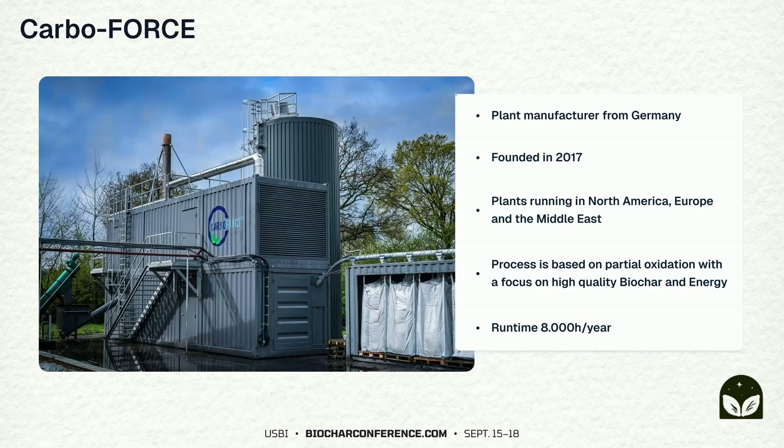Where we are in our stage of growth, we say 3 phases here. We actually have multiple phases, but we'll go through 2026. We've launched our first plant. We have a second one that's in development right now. Our first plant will deliver just over 400 or 500 tons of biochar per year. The second gets up to 4,000, and then phase 3 in 2026, with our expansion, we'll have over 17,000 tons of biochar per year. So that gives you a sense of that.

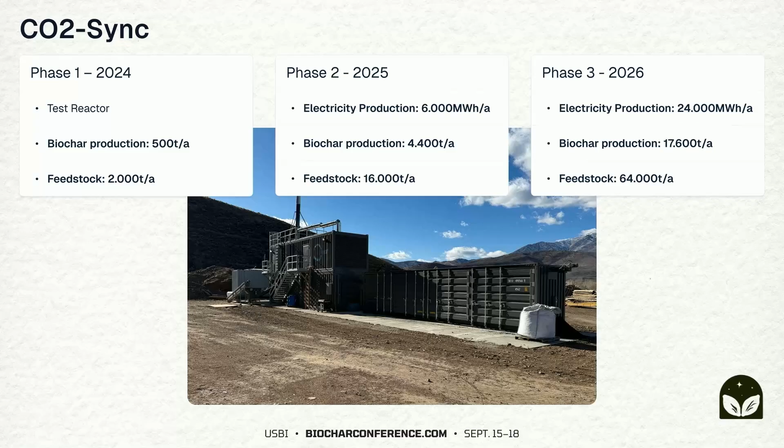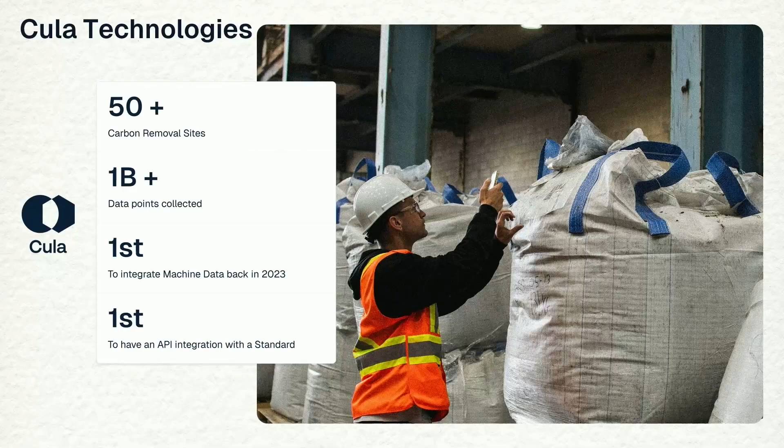For tracking and automating this whole entire process, we use Cula. From pulling it out of the earth to putting it back in the earth, we're tracking that whole process. When we looked at what we wanted from a system like this, one is the interface, because multiple people will be touching it—does it look good, can we actually interface with it? And then the second is automating as much as possible that entire data collection process. Part of that automation is the integration into the solutions itself, so we have API connections into the technology so we can track it throughout the entire process.

Our process, what is unique about us from a producer—there are a few things. First is our feedstock. We're mostly focused in the Mountain West. We use infested beetle kill forest as our feedstock. There is a significant amount of this forest available to us, and we set up locations that are strategically placed as close to that as possible. So we use that beetle kill forest, we chip it up in the forest, and then we bring it into the plant itself.

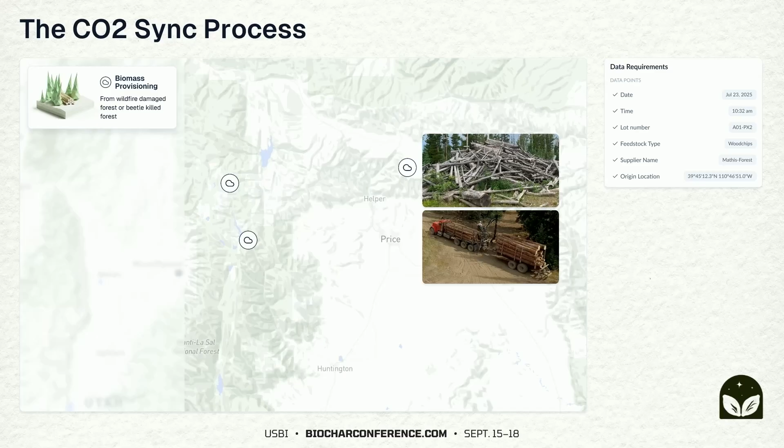Now, once we've done that, that's almost the end of our human intervention. We bring it in, we weigh the trucks, we then collect that data automatically, and it's integrated into the Cula system. Then we dump the chips into 3 separate cement bunkers. And then we have a system, a top load system from AA Biomass, and that's automated. We're not moving chips from one place to another and then staging it for drying and all of that. We just move it to one place, we put it in there, and then the pyrolysis system calls for it at a certain rate, and we're pulling that in.

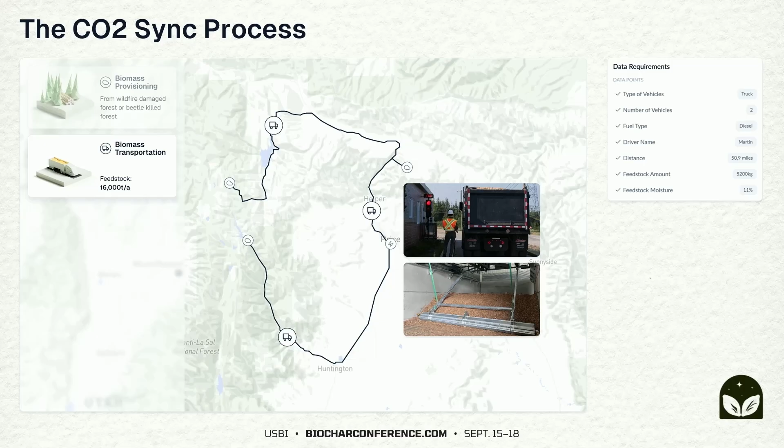That gets to the second part of this, which is the pyrolysis itself. The other thing that we've done to eliminate the labor and the input is we have integrated dryers into that, so we're not second staging it. CarboForce has an integrated dryer, and that way we can just move it straight in there. It's drying, it dries it out to the right moisture, and then we're pyrolyzing it.

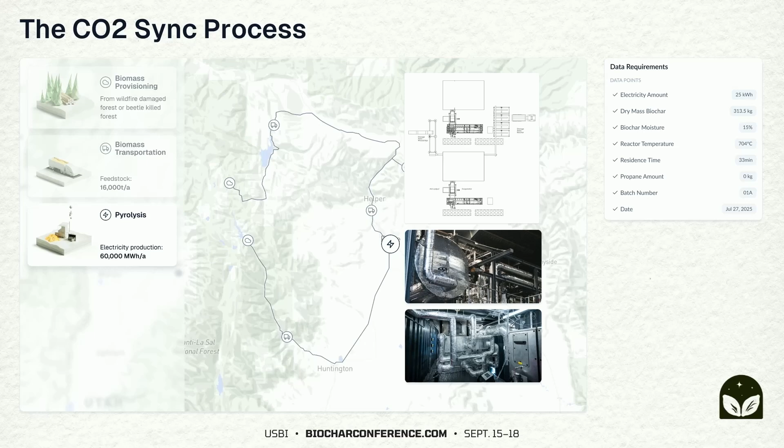From there, I'll get to the end, which is the off-take. We have 4 separate trailers that collect the biochar. That's important for a couple of reasons. One is we need flexibility in when those off-takes happen, but we're still not having any humans moving material around—it loads those directly. The other reason, though we're not doing this yet, is it allows us to sort and size different particles of biochar by unit, so we can be more customer focused. If someone needs a certain particle size or treatment, we can load one trailer with that and another trailer with another.

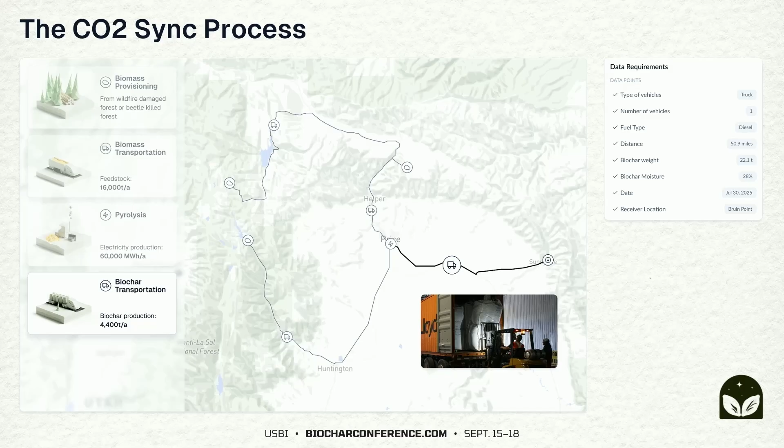The other thing with our plant is that we generate about 500 kilowatts of electricity, which gives us a third revenue stream for profitability. We consume some of that electricity ourselves, so our system is completely self-sustained, but we generate significantly more than we consume, and we sell that—in this case for phase 2, and partially phase 3—to a local business right next door to us. So we track that entire process, and we have a local off-taker that mixes it with their special formula for final input into the ground.

From there, we've tagged that biochar with every bit of data we have, and it's all automated. So we know this biochar was produced on this date, with this moisture content, at these temperatures, with this type of chemistry, from this forest—the whole entire process. That information is wrapped into the biochar, and ultimately it's put into the ground.

In that entire process, when I talk about profitability, there's really no one in that process—other than individuals on the harvesting side and transportation on the output. Other than that, the whole process is automated, and we can run these machines remotely. The feed and offtakes are all done automatically, which allows us to gain that element of the profitability chain.

Then Cula takes over from there, and that's how we're able to track and keep track of all of our CORCs for sale. With that, I'll turn it over to Oliver and let him talk about all the good things he does. Thank you.

Maybe just a reality check before we get into how we're automating things. It doesn't matter if a project has an MRV or if they try to do it themselves—when you go on site, it's always the same thing. It starts with pen and paper, producers collecting things on pen and paper, then they give it to someone who puts it into Excel. Even if it's done in a fancy MRV system, it has an Excel upload, and that data goes to the standard. If you want to scale this industry, that's something we need to change. This works for small productions, but as soon as you get to industrial scale, and also globally, we want to make sure we scale this market safely.

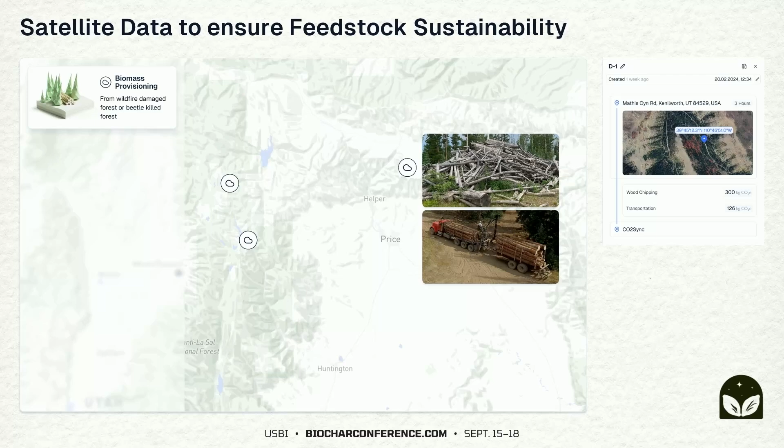Now let's look into the data. We know they're using wildfire damaged wood as well as beetle kill wood. One of the buyers who cares most about feedstock sustainability sourcing is Microsoft—they're really putting a big emphasis on that. So here we're using a mix of GPS and satellite data. When you go collect the feedstock, you just press auto-detect location, we get your GPS, and then we can use satellite data to basically see the impact of this process.

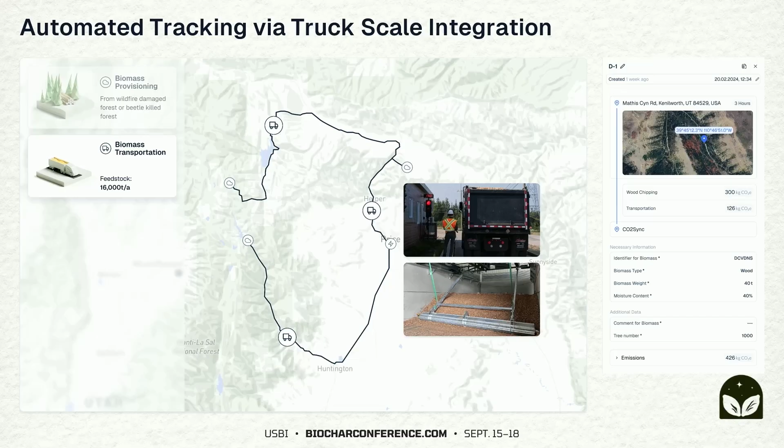So when feedstock comes in, like a new truck arrives, the feedstock level goes up, and we have this integration with the feeder speed as the feedstock is slowly going into the pyrolysis reactor. There are also safeguards. In this case, we decided on 20%, but that's up for the producer to decide - at what point do I want to be notified that I need more feedstock?

So it's really meant for you to focus on your operations and not have to worry about all the little things on site. We also track the moisture and the qualities of the feedstock going in. At the end, that's usually the discussion point between machine manufacturer and producer - they're always fighting like, oh, the machine broke down, why did it break down? And often it's the feedstock. So making sure the feedstock has the right characteristics is typically what makes a machine run smoothly.

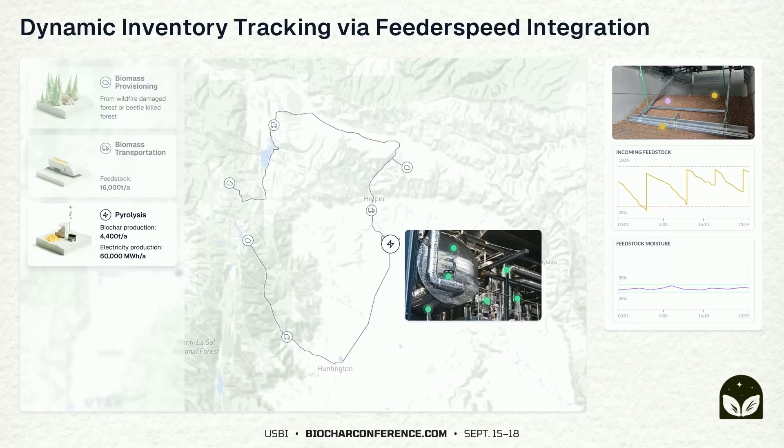Then to the next part - I think that's one of the most exciting parts. It's actually not a fake number: it's 444 sensors that are integrated in this project. I tried to talk to CarboForce into doing one more or one less, just to make it look a bit more real, but it's actually the right number.

So what we do here, you see it on the top right picture - we have these edge devices, like a microcomputer that we connect to the PLC, the programmable logic controller. And here we're basically able to stream all of the relevant data.

What's unique about the system is it's actually offline-first, and all of our software works offline-first. Why do we do that? Sometimes the internet goes out - we have it in Germany, in the US, all around the world - internet cuts out, and that's typically when data is lost. You want to make sure wherever you operate in the world, even in the most remote area, that you always have the data, because at the end, data also means carbon credits. So if you lose the data, that's also basically big revenue being lost.

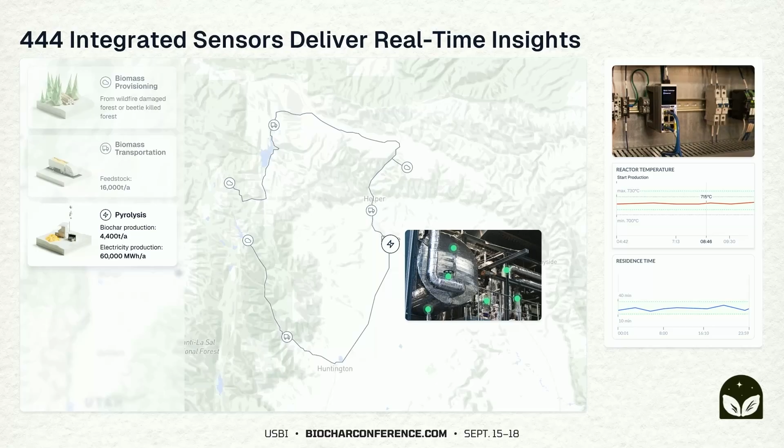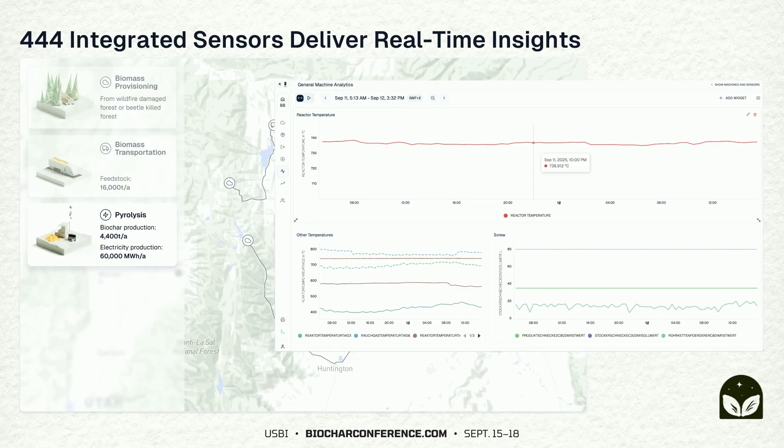Then, coming to the more interesting part, with this data you can do a lot of interesting things. First of all, CO2 Sync can monitor production at all times. We focus on different temperature zones, screw speeds, different pressure zones, to really optimize how the machine is running. The goal is to have as much throughput as possible with the highest quality product coming out. Also, when you test different sorts of feedstocks, you want to know how the reactor reacts, because they can have a very large impact on your operations.

With sensors, we can also automate the inventory. Here we did it on a per-day basis, but it doesn't matter - we've done it on super sacks, on small 50-pound bags, to containers. At the end, we decide with you what makes most sense in your operations. In this case, we decided on a daily production level, so we know every day how much biochar is being produced.

What's interesting for CarboForce is they actually have the option to produce 4 different sorts of biochar, because they have 4 different storage locations. So if you have specific recipes, specific process temperatures to produce a biochar that suits one end application, that's something we can automatically track by looking at the process temperature and defining parameters. As long as it's within these parameters, it's going to be this recipe - allocating different qualities of biochar automatically.

It's not just for the quality of biochar, but also for the quality of carbon removal. I think that's what we've really put a lot of work into recently. We're working together with Hamed Sanei, who I would say is the leading researcher when it comes to permanence research of biochar. Basically what we see right now is there's one lab test per year or per batch - and a batch is typically a year, sometimes a month, depending on the standard. So if you have just 1, 2, 3 lab tests, that's a lot of uncertainty about how good this carbon removal is in reality.

By focusing on machine data and how the process is working in real time, we can also start doing more real-time predictions. So we're working here on a prediction algorithm with Hamed Sanei to predict how much of the stable part of the biochar is part of the biochar. With that, we'll be able to reduce the uncertainty when it comes to credits.

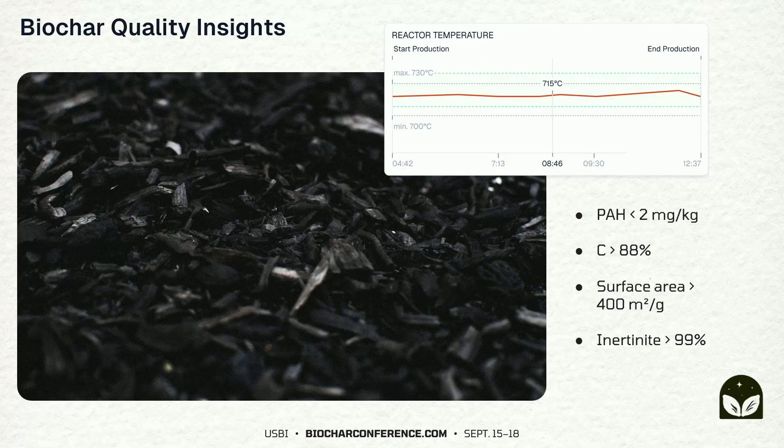Then to the last fun parts. We do all kinds of integrations to CRM systems, invoicing systems. In this case, we have the integration with QuickBooks. So when you sell biochar, you also want to have this as automated as possible, so you create it within QuickBooks—for example, hey, we want to send out 2 truckloads of biochar today.

Then the operator on site gets a notification. They know two truckloads need to leave today. They go over the truck scale, and then you can invoice based on the specific amounts. So 2 trucks go over the truck scales, it connects back to QuickBooks, and then you invoice on the specific amounts and also specific qualities of this biochar.

The last part of this puzzle piece for every good carbon removal is not just how you remove the carbon, it's also how you store the carbon. So here it's the biochar application. It differs quite significantly if it's concrete, asphalt, or agriculture.

One way to do it in agriculture is through tracking links and GPS data. We basically have those tracking links that you can send out to your partners, where they select how biochar was applied. We know where it was used, with GPS coordinates, and have some legal things like no burn agreement, the renouncement of carbon rights—basically separating the digital from the physical goods, so the legal aspect is clear here as well.

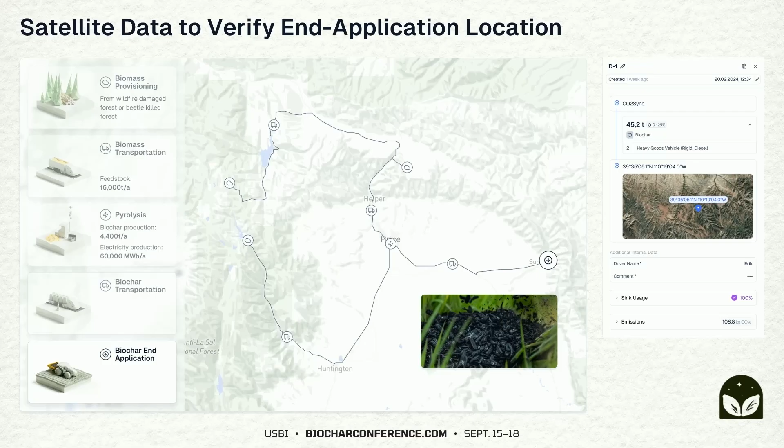As soon as that is done, we have all the data from where the feedstock is coming from to how it was produced and also how it was applied. We automate and compile it, and we're the only system that has APIs to all leading standards that have APIs right now. So it's not the only standards we work with, but it's all standards that have APIs. With that, we're also dramatically able to speed up this process.

The fastest we've seen from biochar being applied to a credit was 3 days, and typically it's multiple months. So that's something we're also working with standards on—not just doing it monthly, but doing it in real time, because it really just speeds up how people get their revenues.

And last part—once you have a credit, it's not just a credit, it's a story behind a credit. There's a way carbon was removed, and if you talk to buyers, many people never heard of biochar. There are like 7 or 8 different methodologies, different types of removed carbon. So we created this Cula Carbon Hub to help you basically communicate your impact.

It's like a visualization tool—quite simple, but it's really just for you to help showcase how carbon was removed in real time. That's really something that has been quite powerful. Our projects have sold to JP Morgan, Microsoft, Klarna, Spotify, and all those names, and it really helps getting into those conversations.